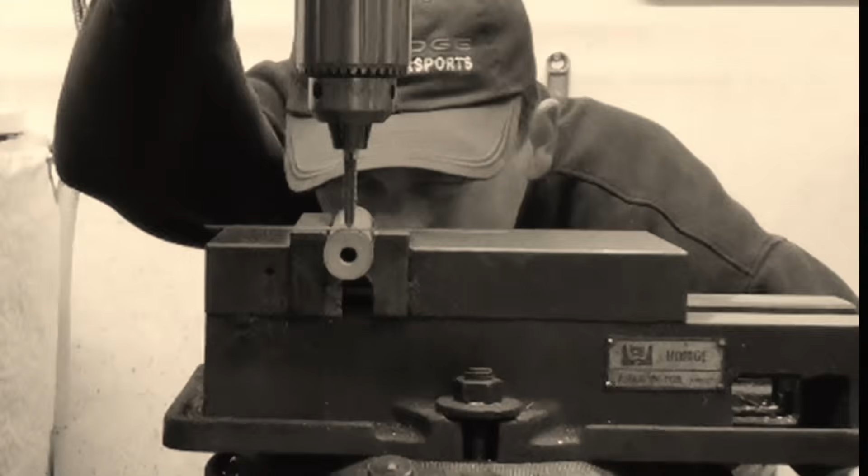Sometimes a machinist can look at a metal part and swear it is perfectly round. Then the part goes into service. It spins at speed. The oil film thins to almost nothing. The load hammers the metal thousands of times a minute, and suddenly the eye is no longer good enough. Tiny errors turn into disasters.

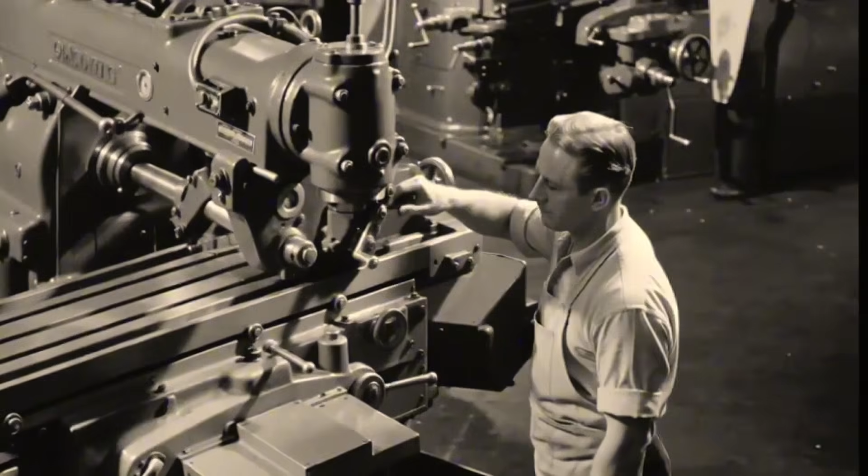Not round enough, and the bearing runs hot. Not concentric enough, and the shaft starts to vibrate. Then one day the whole production line begins to scream. That is the end of it. The line shuts down. Maintenance takes over.

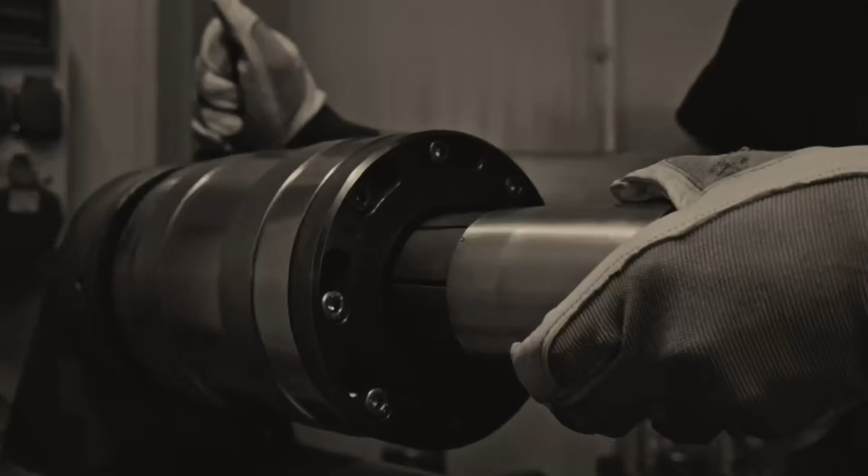Production stops. American machine tool history is full of famous giants: massive lathes, heavy milling machines, boring mills, planers, transfer lines. But there was another class of technology that drew far less attention. These were not the machines that carved a new shape out of raw stock. They came afterward. They took a part that was merely close and pushed it to the state modern industry actually needed: rounder, smoother, more concentric, more repeatable, and almost impossibly exact. That was the world of precision grinding.

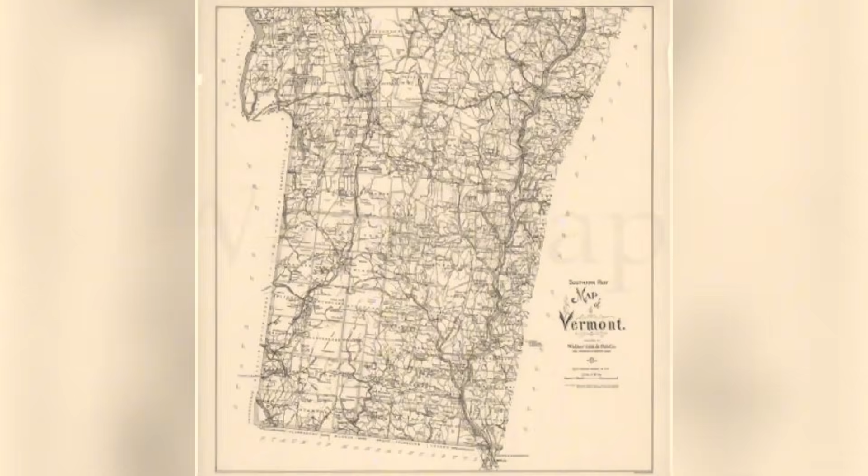And in 1909, in a small town in Vermont, William LeRoy Bryant founded a company to turn that simple idea into an industry. How do you grind parts held in chucks, internal bores, inside and outside diameters, bearing races, and circular surfaces until the remaining error almost disappears from human perception? In this video, we are tracing the story of the Vermont grinding machine that chased perfect roundness all the way down to the micron.

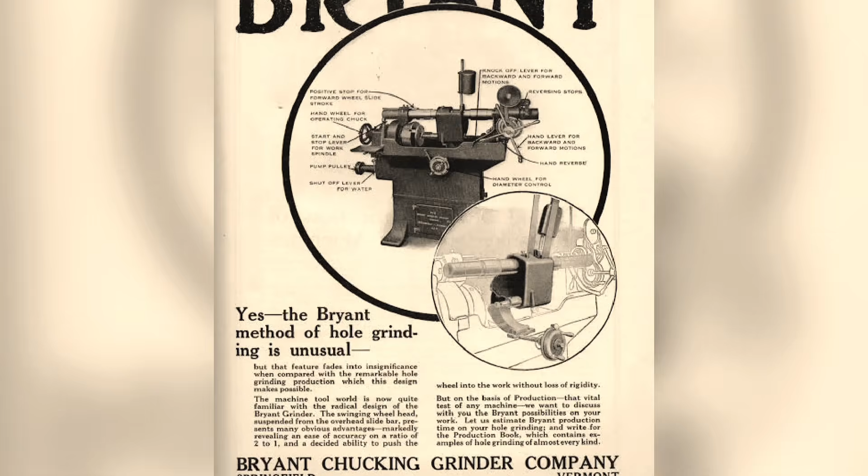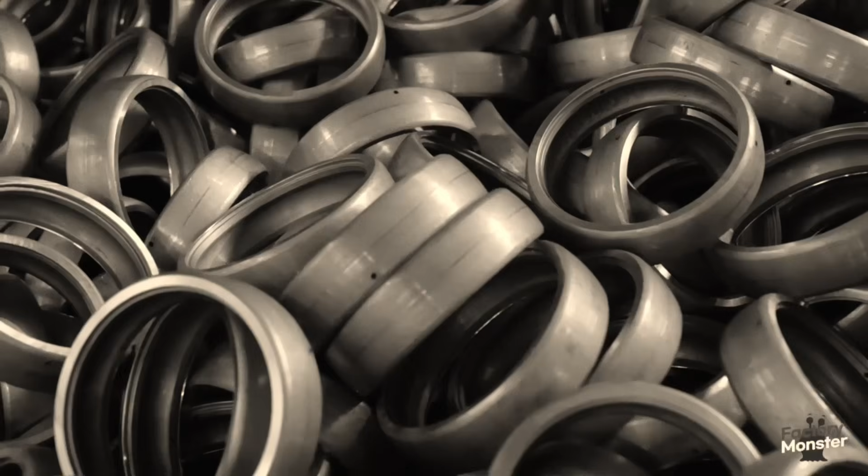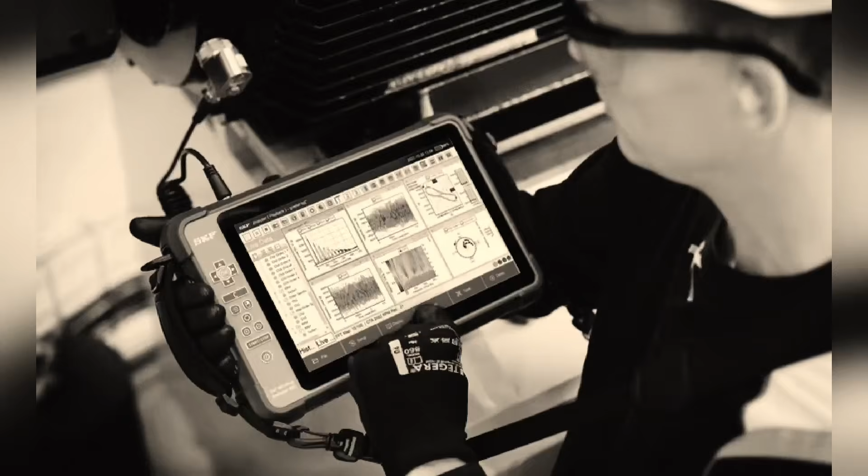First, we need to answer a basic question. Why did roundness become such a bottleneck in manufacturing? Most machinery depends on flatness. Flat surfaces are the foundation of machines, but roundness is what allows machines to rotate. When a shaft spins inside a bearing, its geometry cannot be merely approximate. When a ball bearing race carries dozens of hardened steel balls around a track, that surface cannot wander and ripple at will. When pistons, bushings, gears, spindles, housings, and engine parts work continuously, geometric error becomes heat, vibration, noise, and wear. And in mass production, the problem becomes much worse.

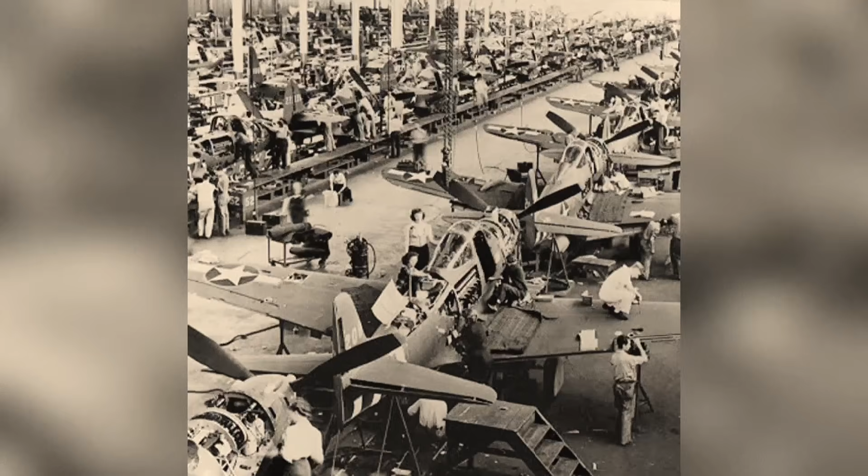A skilled machinist can rescue one part. The automobile industry does not need one part. It needs thousands, then millions, all effectively the same. Aviation does not need one engine that runs well in a test room. It needs many engines that can survive vibration, temperature, load, and flight time.

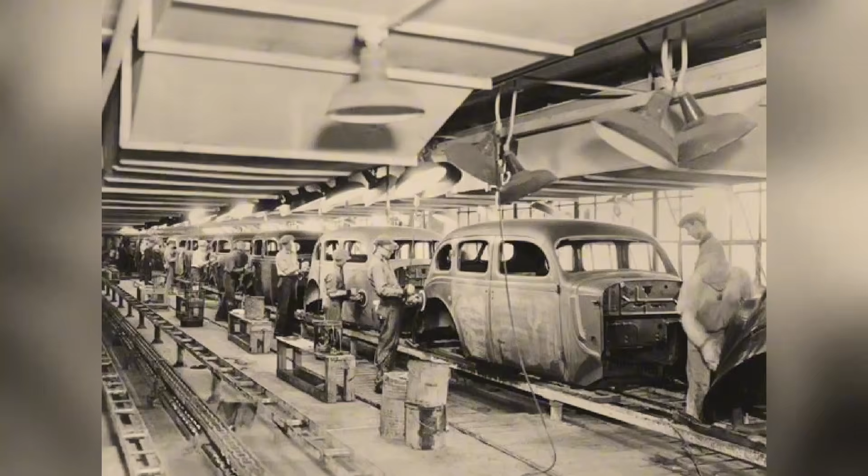By the early 20th century, American industry was entering the age of high-speed production. Automobiles were beginning to move from luxury goods into mass manufacture. Aviation was leaving the experimental stage. Machine tools were getting faster, steel was improving, grinding wheels were improving. But the faster industry moved, the clearer one fact became: cutting metal was not enough.

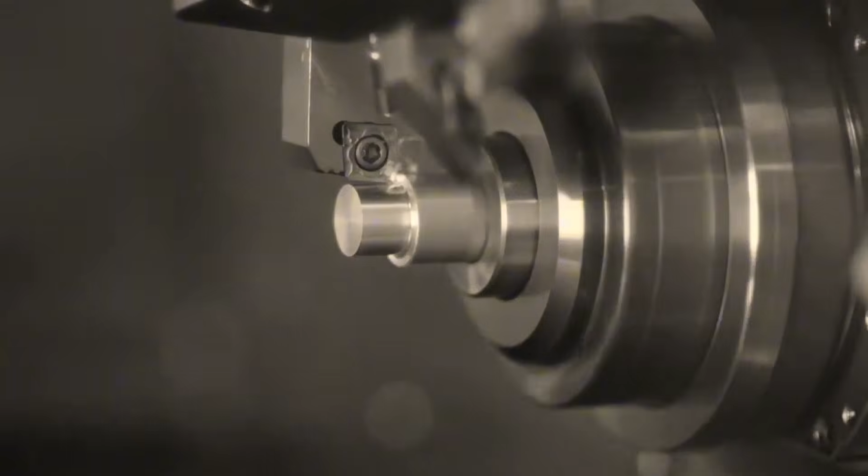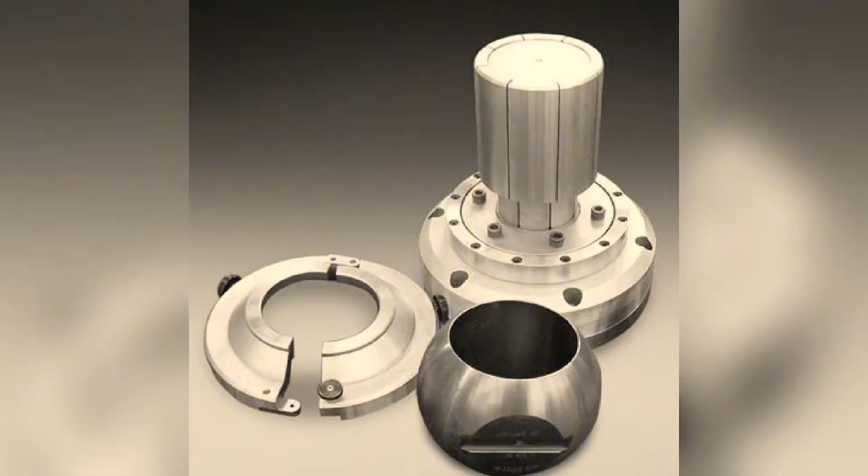A lathe could turn stock into a near cylinder. A drill and a boring tool could make a hole. A mill could generate surfaces and slots. But after those operations were finished, many parts still had to be ground. Grinding did not merely brighten a surface. It corrected the small remaining errors. It improved roundness. It stabilized size. It created surfaces that oil films, bearings, and high-speed motion could live with.

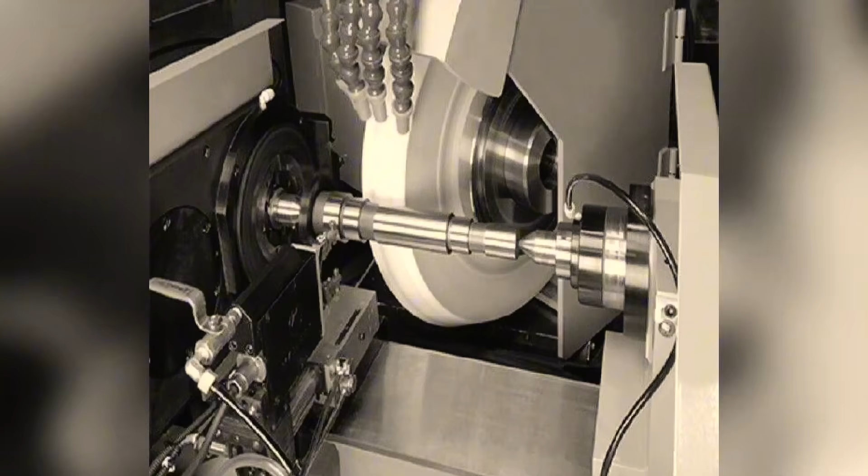The bottleneck was that the parts needing grinding were not always easy to hold. A long shaft could run between centers, but a short part, a ring, a bushing, a compact housing, or a turned semi-finished component often had to be held in a chuck. And once a chuck enters the problem, the challenge is no longer just rotating the work. The challenge is holding it truly on center, bringing the wheel exactly where it belongs, controlling the size, and repeating the process fast enough for production.

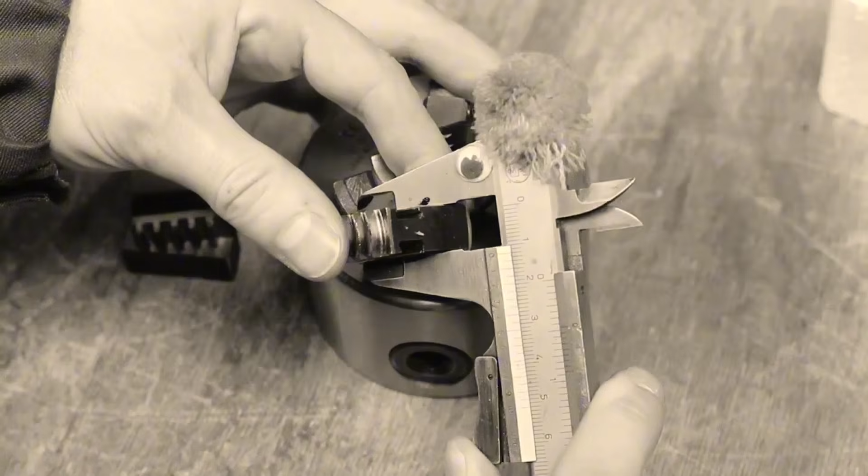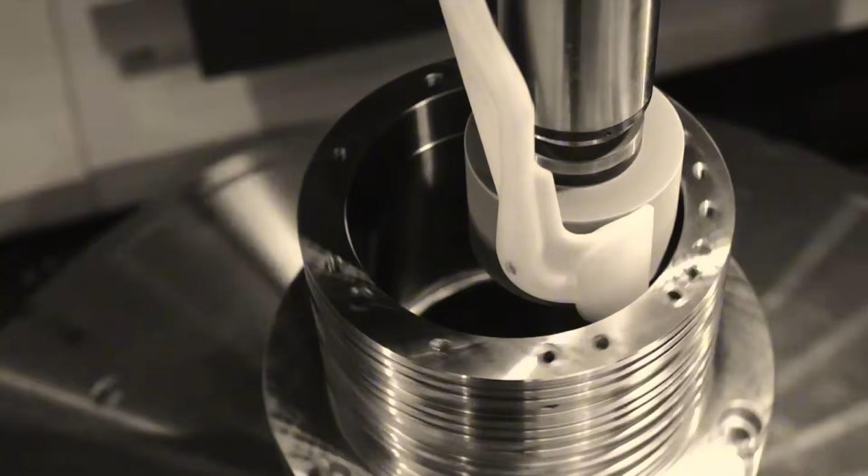That is why machinists became so familiar with a phrase like chucking grinder. It referred to a whole class of grinding machines built for parts held in chucks, usually as second operation work after turning or rough machining. This was exactly the kind of work the automotive industry, the bearing trade, precision equipment makers, and the defense sector increasingly needed. So the early 20th century demanded a new generation of grinders, faster, more accurate, more automatic, and better suited to quantity production. Bryant arrived at exactly the right time.

William LeRoy Bryant, usually called Roy Bryant, was no amateur. He came out of one of the most remarkable machine tool environments in America, Springfield, Vermont.

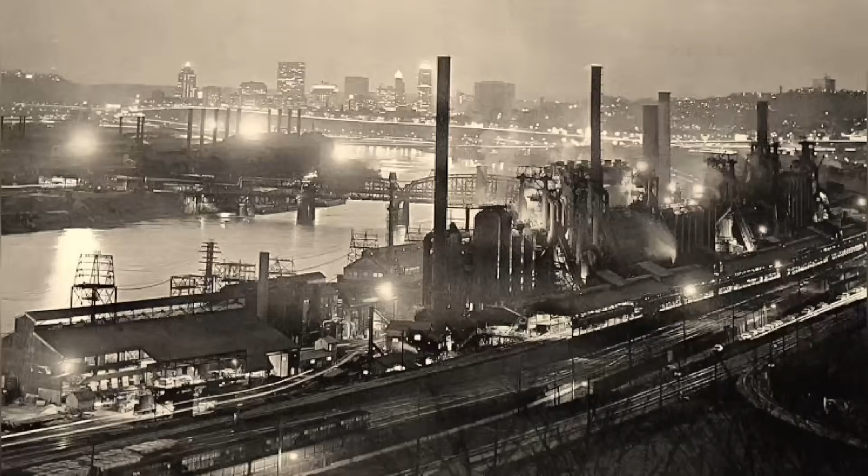The town had no obvious advantage like Pittsburgh with steel, Detroit with automobiles, or the coastal cities of New England with ports. What it had was something even more important: an unusually dense concentration of inventive masters. Springfield sat in what became known as Vermont's Precision Valley.

Jones Lamson Machine Tool Company had moved there from Windsor in 1888 under the leadership of James Hartness. Hartness was an inventor and executive, later the governor of Vermont, and most importantly for this story, a mentor to a generation of machine tool builders. Under Hartness, Jones Lamson was not just a factory, it became an unofficial school for mechanical engineers.

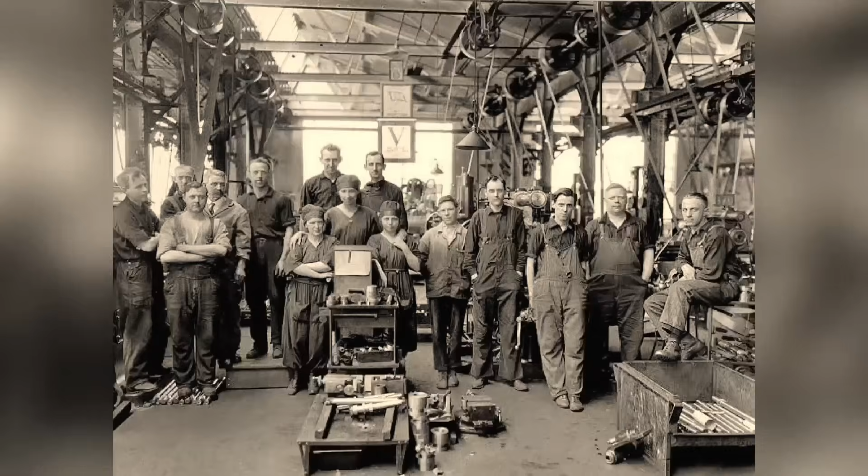Edwin Fellows left that world to found the Fellows Gear Shaper Company in 1896. Fred P. Lovejoy founded Lovejoy Tool Company. William L. Bryant founded the Bryant Chucking Grinder Company. Together, these firms turned Springfield into a machine tool center far more influential than the town's size would ever suggest.

Bryant joined Jones Lamson in 1897. By 1899, he was head of the drafting department. By 1905, he had become chief engineer.

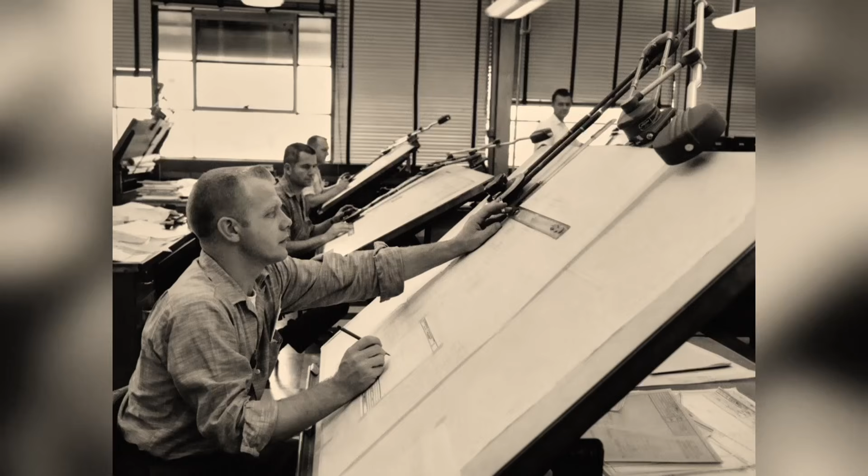In a machine tool company, the draftsman and designer must understand cutting forces, bearings, castings, tolerances, drives, cutting tools, and the operator at the machine. A bad drawing does not merely make an ugly machine, it makes a machine that cannot be built, aligned, or trusted to hold tolerance.

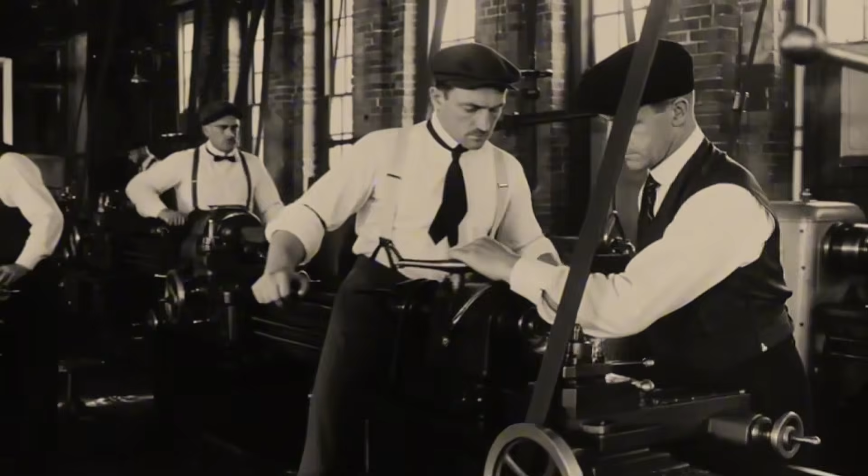While working with Jones Lamson chucking lathes, Bryant saw a problem that had not been properly solved. After turning, many parts still needed grinding in a second operation. If that grinding was done slowly, the line choked. If it was done inaccurately, the value of precision turning was lost. Out of that problem, Bryant developed a multi-spindle grinding machine for second operation work.

James Hartness encouraged him to strike out on his own. Hartness also helped provide the initial financing and became the first president of the Bryant Chucking Grinder Company. Roy Bryant later assumed leadership himself. In 1909, the Bryant Chucking Grinder Company was established in Springfield, Vermont.

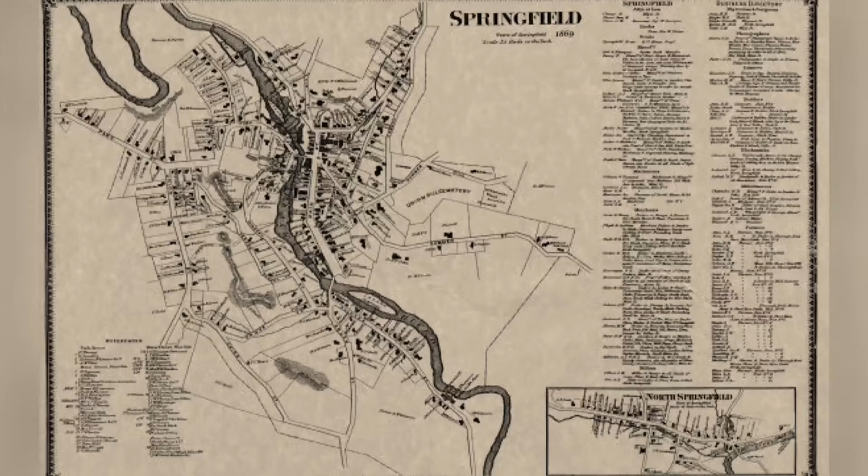A year later, in 1910, the company built a plant of roughly 20,000 square feet directly across from Jones Lamson. That same year, Bryant shipped nine machines to Ford and Cadillac, aiming straight at the most important industrial market in America, Detroit. It was a shrewd move.

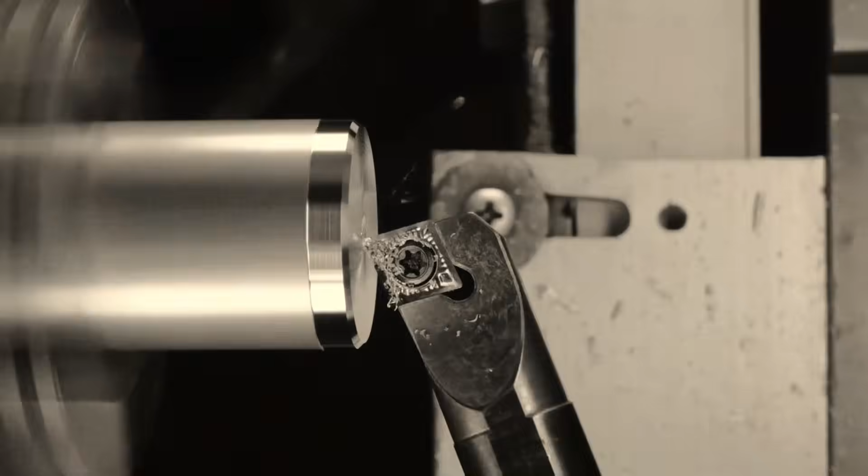To understand Bryant, it helps to understand the difference between shaping and finishing. A lathe creates form. It spins the work and uses a cutting tool to bring the metal near its intended diameter. A lathe can be extremely accurate, but the tool still leaves tool marks, cutting forces, slight distortion, and small geometric errors. For some parts, that may be enough. For simple shafts or lightly loaded components, near enough can be good enough, but for bearing races, bores, bushings, thrust faces, engine parts, and precision mechanisms, near enough is not enough.

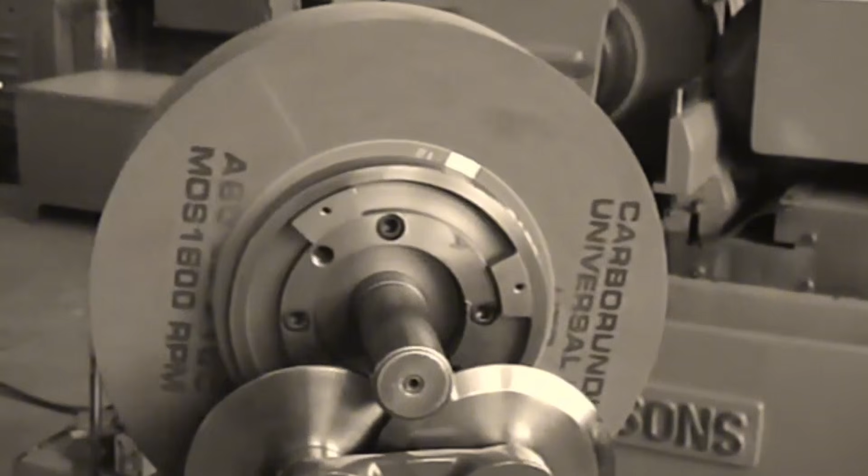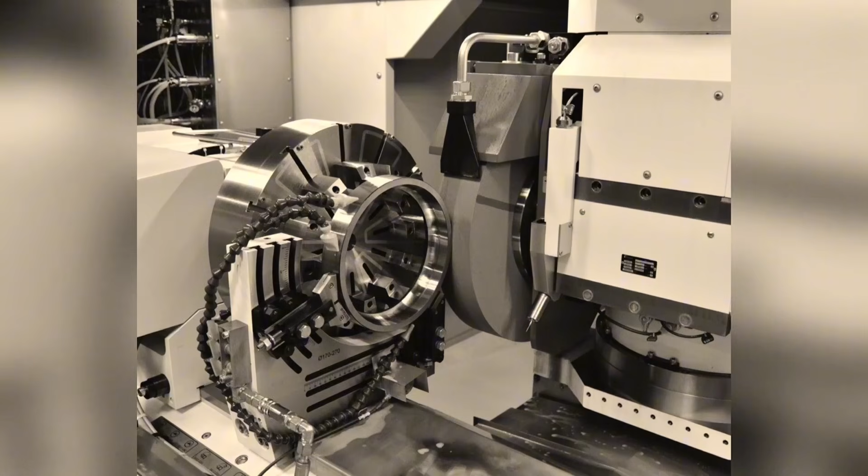A grinding wheel does not cut like a single-point lathe tool. It is made of countless abrasive grains, each removing a tiny amount of material. The result is that grinding can control size and surface in ways rougher cutting processes struggle to match. But grinding also generates heat. It demands rigidity, it demands a good spindle, it demands a method of holding the work without distorting it, and in mass production, it also demands speed.

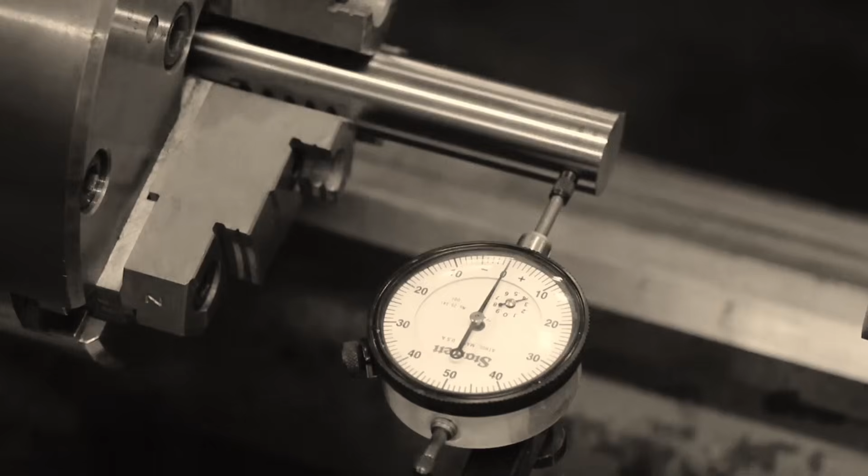Bryant's chucking grinders attacked that problem from the production side. The part was clamped in a chuck or fixture and rotated. The wheel approached the surface to be finished. Depending on the configuration, the machine could handle outside diameters, inside diameters, or related surfaces. With multi-spindle design, multiple tasks could be performed in parallel or in a more tightly organized sequence. That transformed grinding from a slow, isolated operation into a production step with rhythm.

The critical point was not merely absolute accuracy, it was repeatable accuracy. A machine that can produce one good part does not change an industry. A machine has to produce the first good part, the second good part, the 100th, and the 1000th. A factory manager does not only ask whether a machine can grind, he asks whether it can hold size through an entire shift, whether it is easy to set, whether the output remains consistent. Bryant built its reputation by answering those questions well.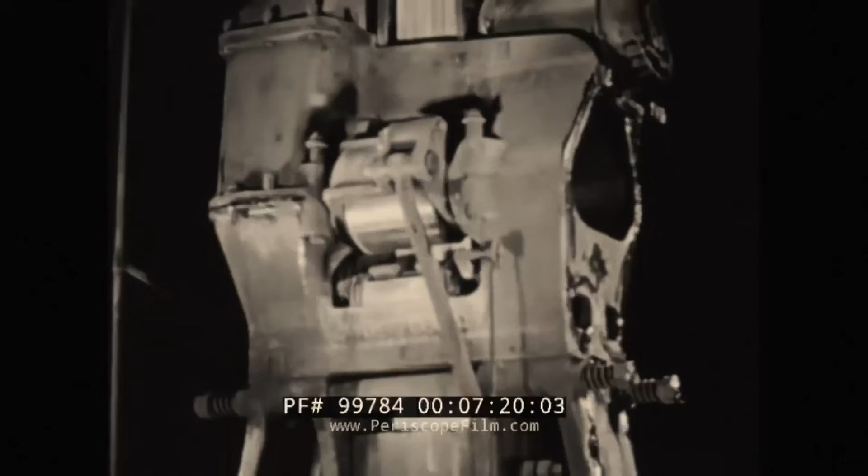In the 1930s, as the Great Depression forced many machine tool builders out of business, Bryant used the slower market to improve its designs. Manual machines were developed toward semi-automatic operation. Hydraulic drives replaced some pneumatic systems. Automatic sizing options appeared. Motorized spindles were introduced rather than relying entirely on gear or belt transmission.

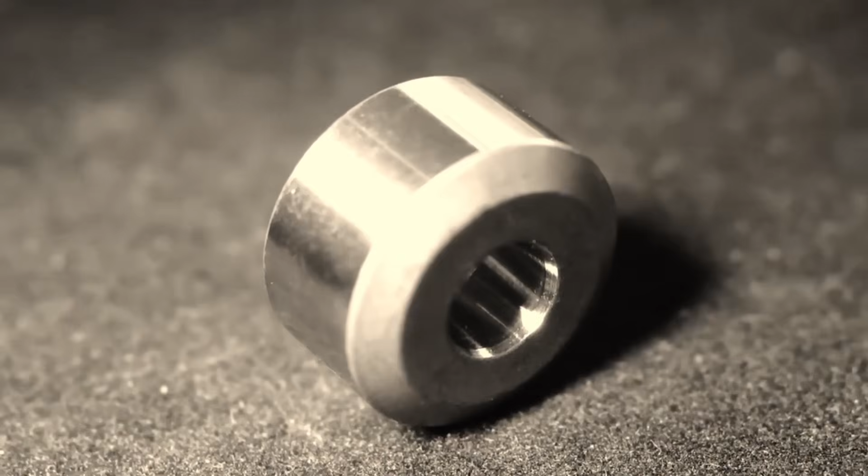These sound like technical refinements, but their meaning was practical. Semi-automatic meant the operator did not have to execute every motion by hand. Hydraulics meant smoother and stronger motion. Automatic sizing meant the machine could move closer to knowing for itself when the part had reached size. Self-powered spindles meant greater control with fewer layers of mechanical transmission. All of it pushed Bryant in the same direction: precision grinding at production speed.

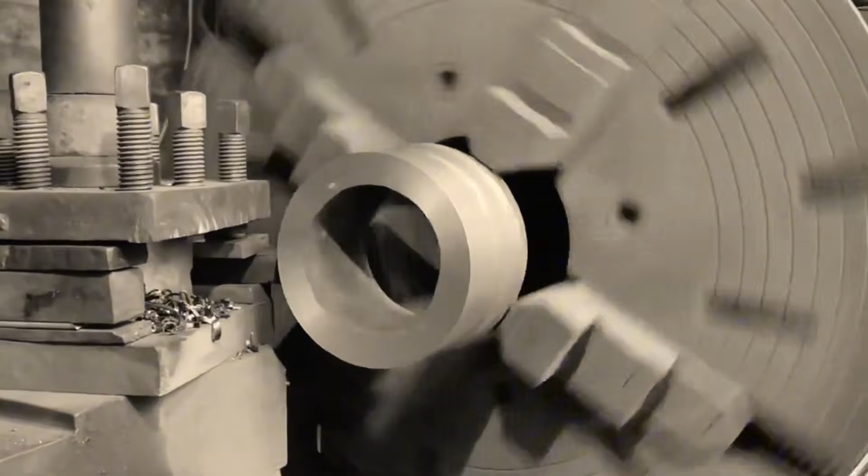That was why the company steadily expanded into automotive work, aviation, bearing manufacture, and precision equipment. Each industry had its own demands, but all of them needed the same things: round parts, accurate bores, fine surfaces, and repeatability.

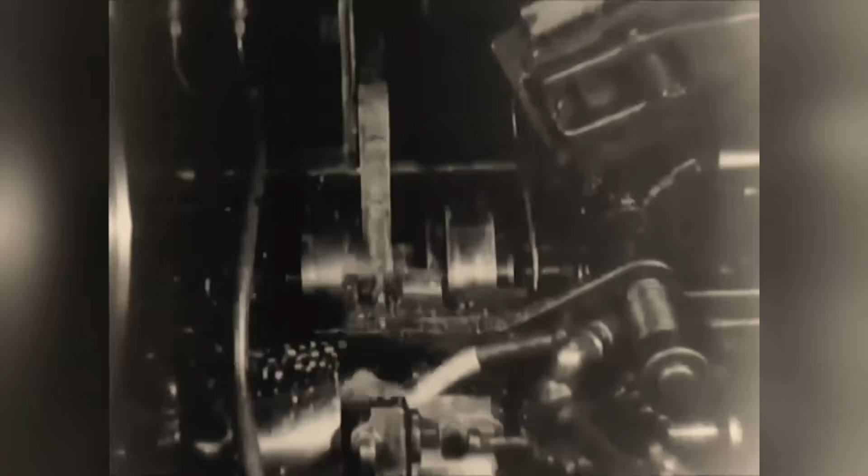When Bryant shipped 9 machines to Ford and Cadillac in 1910, it was still only beginning to step out from the shadow of Jones and Lamson. But those orders showed that the automobile industry had already recognized the value of precision grinding. Ford and Cadillac did not buy machine tools for curiosity's sake. They bought them because automobile production required thousands of rotating and sliding parts: engines, transmissions, shafts, bearings, bushings, drive assemblies, and accessory mechanisms all depended on small geometry. A car might be sold on styling and power, but its reliability lived inside the parts the buyer never saw.

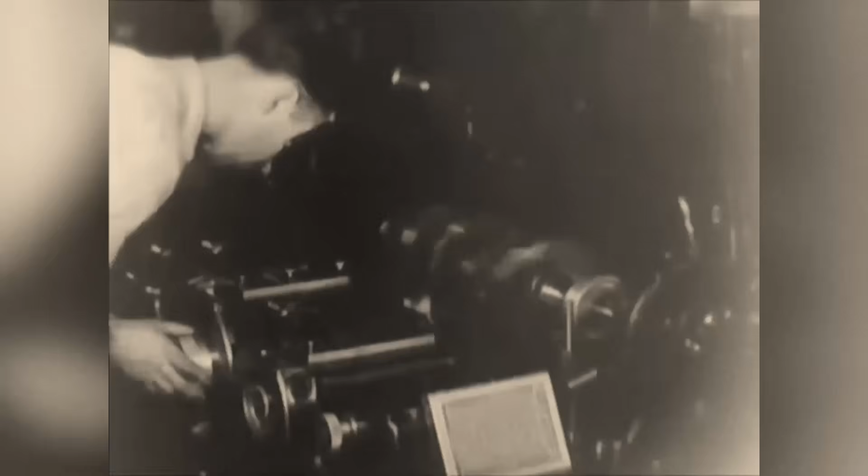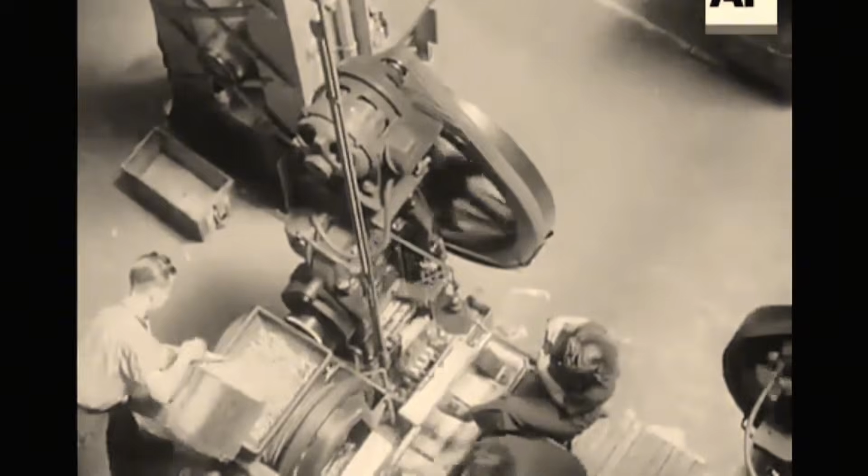Then came the First World War. By 1917, the Bryant plant had doubled in size and was running 3 shifts a day. The company leased additional space from Jones and Lamson to help produce artillery shells. Wartime demand also pushed Bryant to develop 2 new machine models for the aircraft industry.

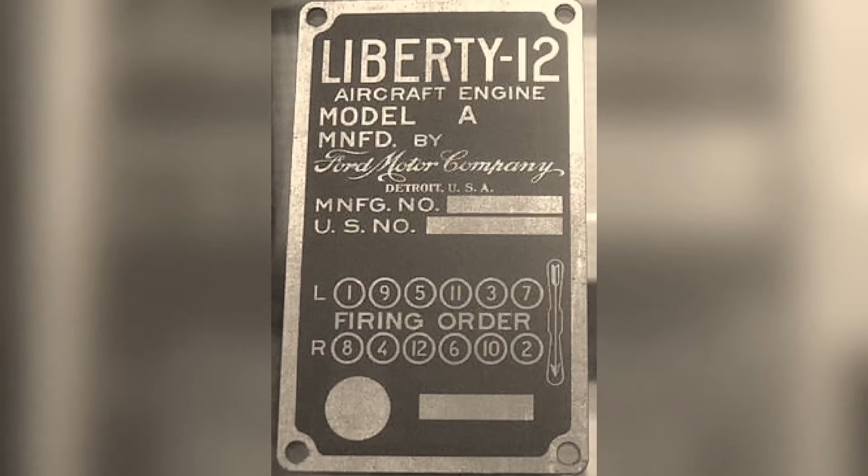One of the most significant milestones came through the Ford Aircraft Division. During the First World War, Ford's aviation operation used 102 Bryant machines in the manufacture of Liberty engines. That was no trivial detail. The Liberty engine was one of America's major wartime efforts to standardize and rapidly produce aircraft engines. And if an aircraft engine requires large numbers of precision parts, then grinders like Bryant sit directly inside that capability.

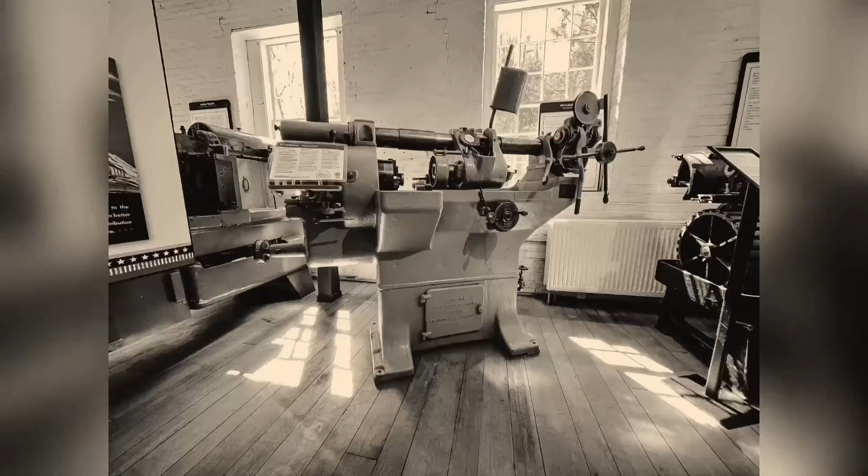Bryant's reputation for precision grew from there. According to historical material later cited by Vermont Machine Tool, from the First World War through the interwar years and into the Second World War, much of the grinding work done on aircraft engines was performed on Bryant machines.

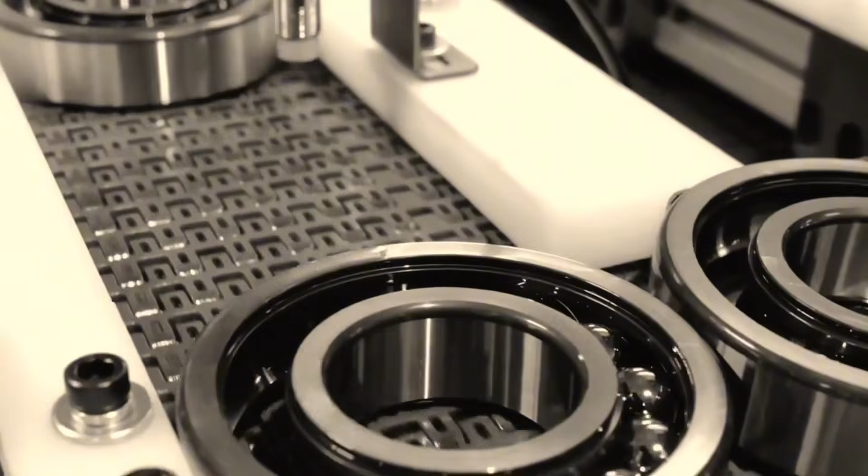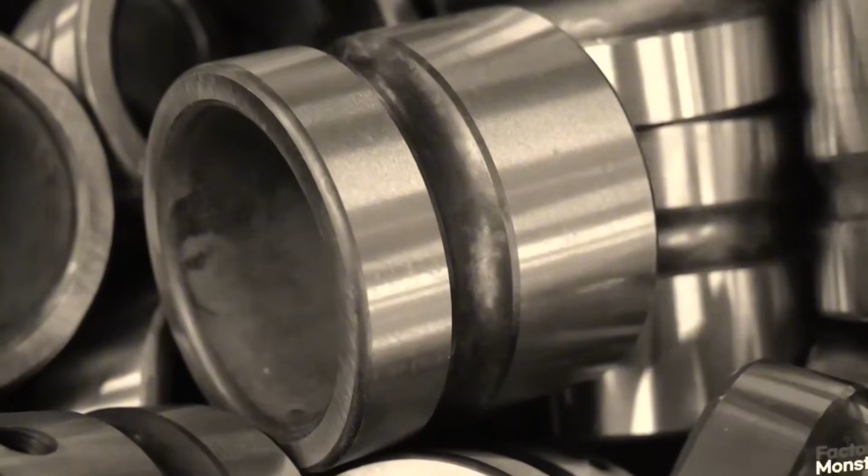After aviation, Bryant moved deeply into the bearing industry. That made perfect sense. Bearings are one of the harshest tests of circular geometry. The inner ring, the outer ring, the raceway, the faces, the finish, and the concentricity all affect friction, temperature, noise, and life. A good bearing is not merely good steel. It is good steel machined to the correct geometry. As automobiles, industrial machinery, aircraft, and military equipment demanded more bearings, precision grinding became part of the industrial foundation.

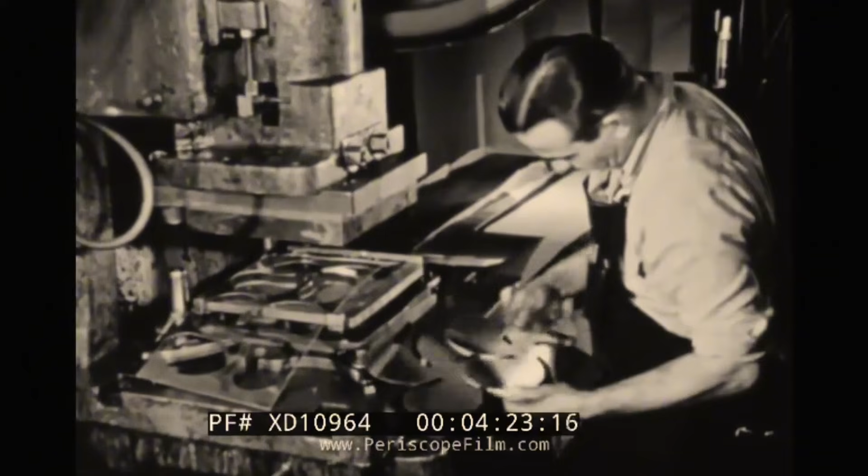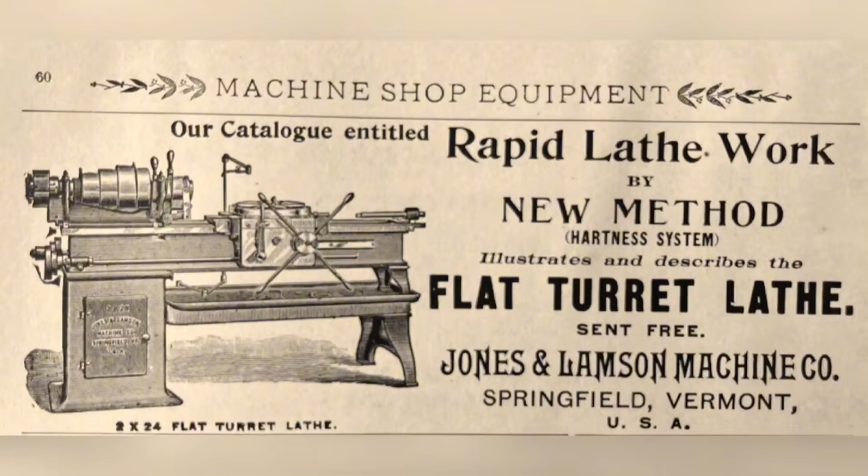Roy Bryant remained president and general manager until his death in 1931. He was succeeded as president by E.J. Fulham, then treasurer of the Fellows Company. That detail also reveals how tightly Springfield's industrial network was woven together. Jones and Lamson, Fellows, Bryant and Lovejoy were not just geographically close. They shared people, capital, technical knowledge, engineering culture, and a common vision of precision manufacturing.

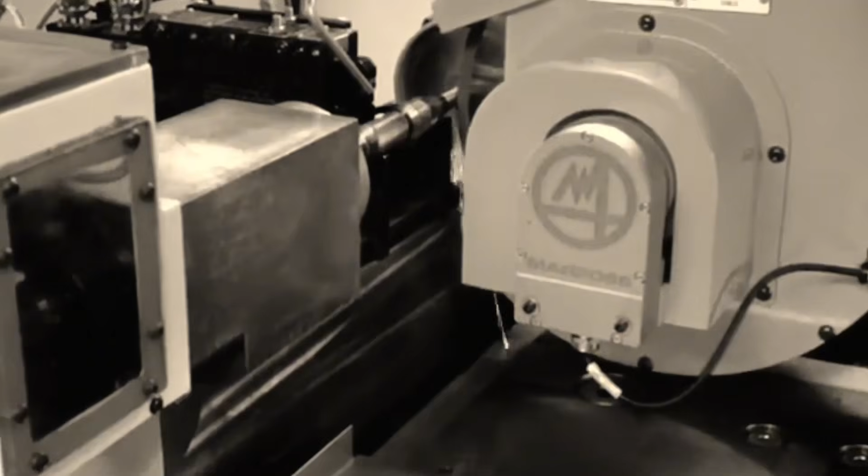During the Great Depression, many machine tool firms were crushed as factories across America stopped buying new equipment. Bryant survived because its product occupied the part of production where customers still needed precision and productivity. Exports also helped some American builders endure. In the 1920s and 1930s, the Soviet Union became a major customer for various American industrial firms, including Ford and some machine tool manufacturers. But Bryant did not simply wait for the market to recover. It used the hard years to improve the machines. That mattered when the world moved toward another war.

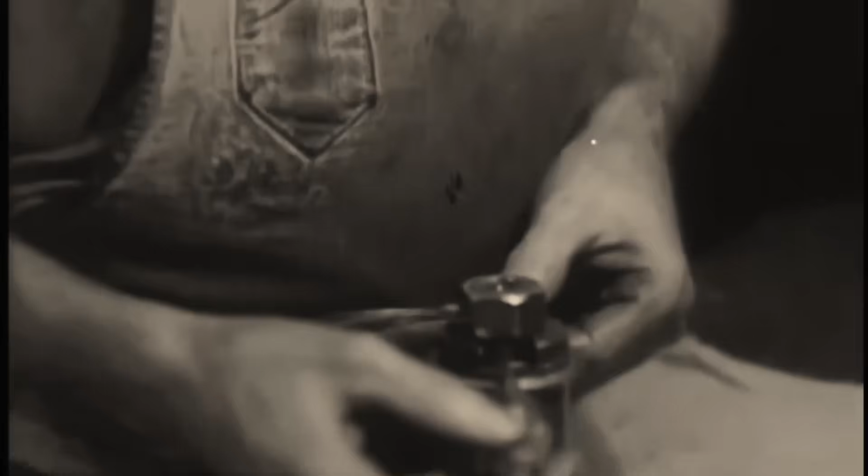Before the Second World War, Bryant was already an important name. The war pushed everything to another scale. In 1938, Bryant's sales tripled. In 1940, the United States Army Ordnance Department asked the company to expand its plant to roughly 127,000 square feet. By 1942, the workforce had grown to around 1,350 people, including about 200 women.

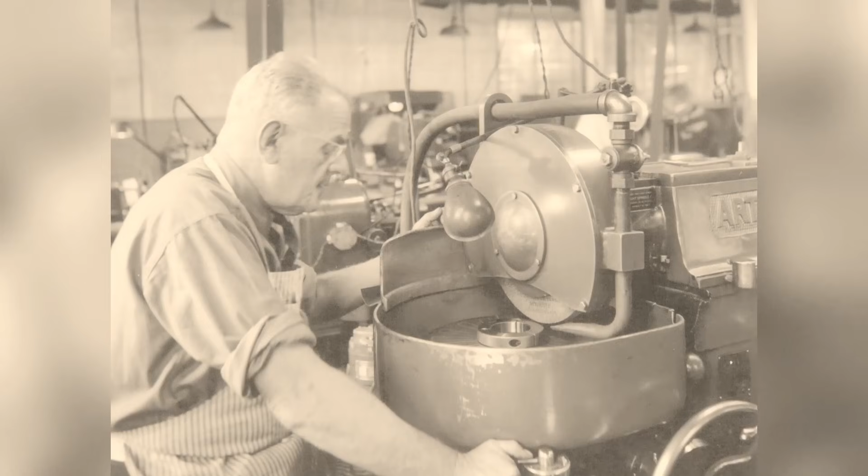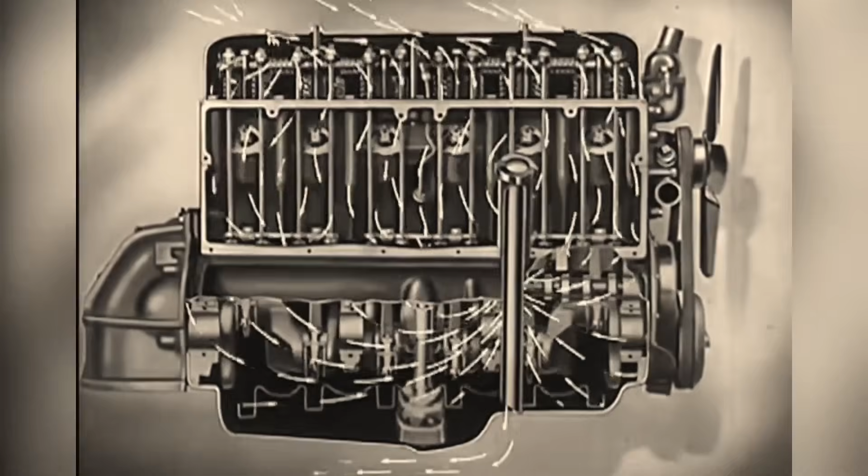Those numbers tell us something important. They tell us that grinding had ceased to be a secondary concern. In industrial war, precision grinding was a strategic capability. If engine parts, bearings, control mechanisms, aircraft components, and complex assemblies could not be ground accurately, weapons production slowed. An airplane does not merely need aluminum and horsepower. It needs thousands of rotating surfaces, bores, and round parts that function correctly under load.

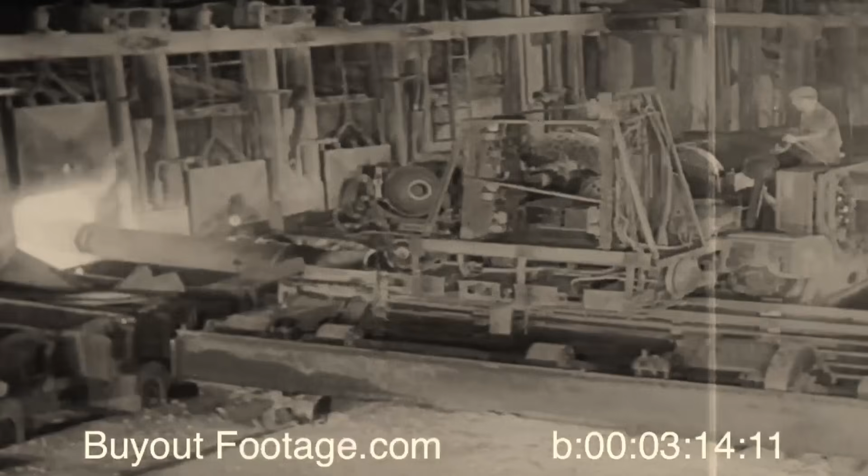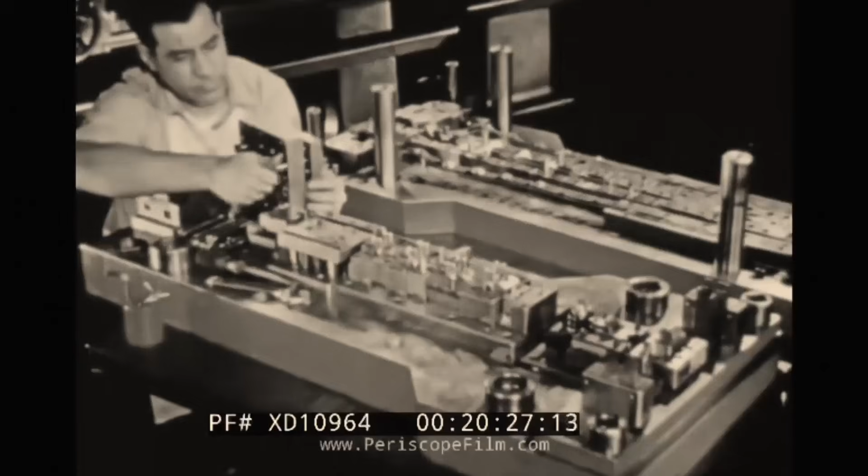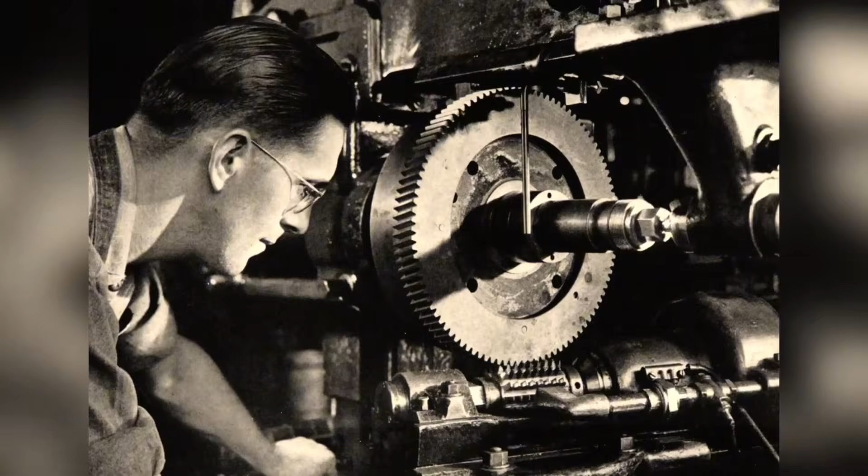Demand became so high that, like many wartime manufacturers, Bryant saw its products built under license by other concerns. During the war, Bryant also manufactured certain radar units for Raytheon and General Electric. That points to another side of American machine tool companies. They did not merely build machines for others. When war demanded it, they could become manufacturers of precision equipment in their own right. A company fluent in spindles, grinding wheels, bearings, chucks, and tolerances already possessed much of the technical foundation needed to produce far more complex devices.

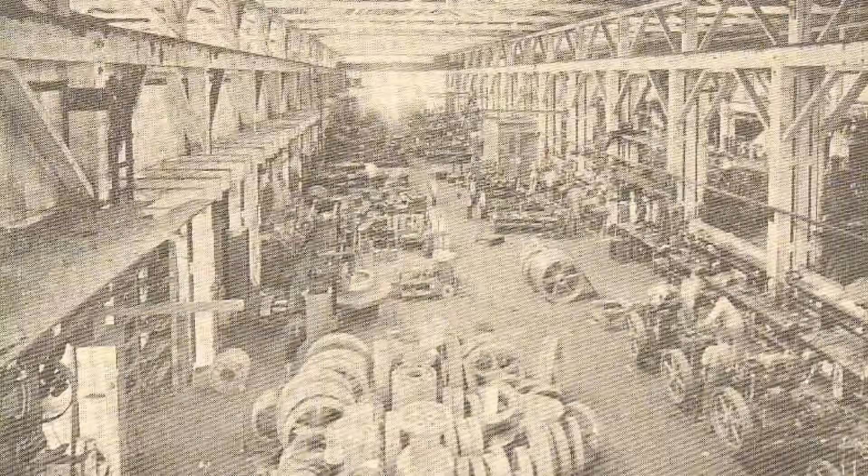Under government direction, the war also left a larger lesson. Industrial power does not reside in a single invention. It resides in a network. Bryant needed steel, bearings, grinding wheels, motors, assemblers, engineers, inspectors, suppliers, military customers, and neighboring companies.

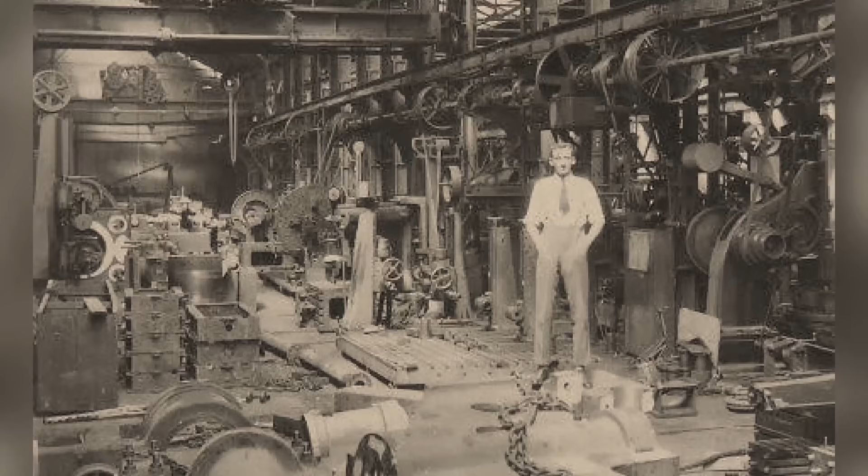Springfield, Vermont became one node in that larger system. During the Second World War, Springfield's importance was so great that the U.S. government reportedly ranked Springfield, together with the nearby Cone Automatic Machine Company in Windsor, as the seventh most important bombing target in the event of an attack on American industrial capacity. That sounds strange for a small Vermont town. But once you understand machine tools as the machines that make other machines, it becomes logical. Destroy the machine tool base, and you cripple the ability to replace, repair, and expand production.

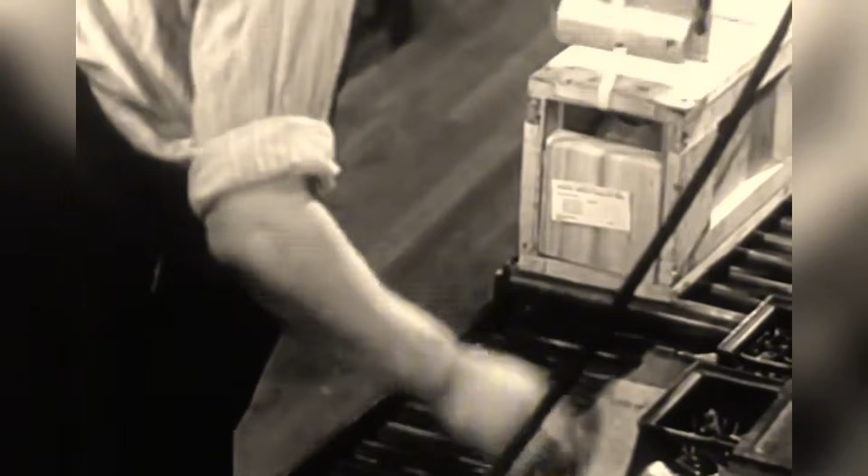In 1946, Joseph B. Johnson, a longtime Bryant employee who would later become governor of Vermont, became vice president and general manager. The company entered the post-war era with a strong reputation, export markets, and deep experience in aviation, bearings, and defense work. But the post-war machine tool world was not going to stand still.

After the war, Bryant remained a strong company, but the structure of the industry was changing. The Korean War drove demand upward again. In the mid-1950s, Bryant's expertise in precision spindles opened a path into a new field, drum memory for computers.

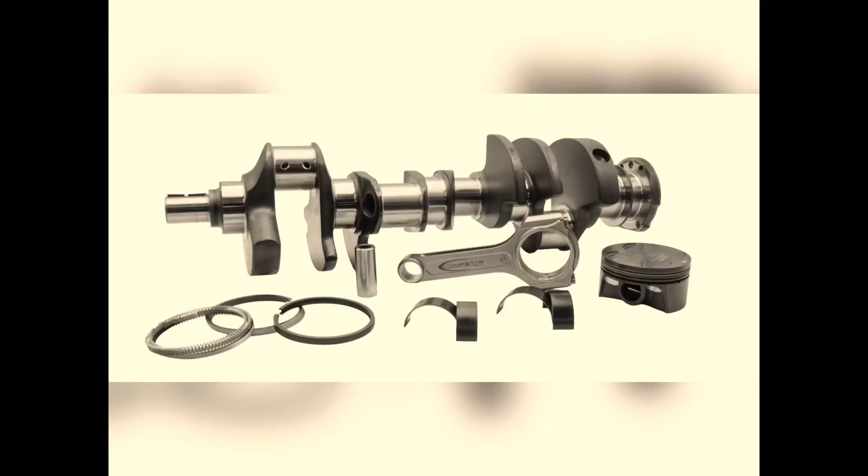At first glance, that sounds unrelated. Technically, it made perfect sense. Drum memory required precise rotating assemblies, fine surfaces, and highly refined mechanical manufacture. A company skilled in grinding and spindle design was well positioned to enter that kind of work.

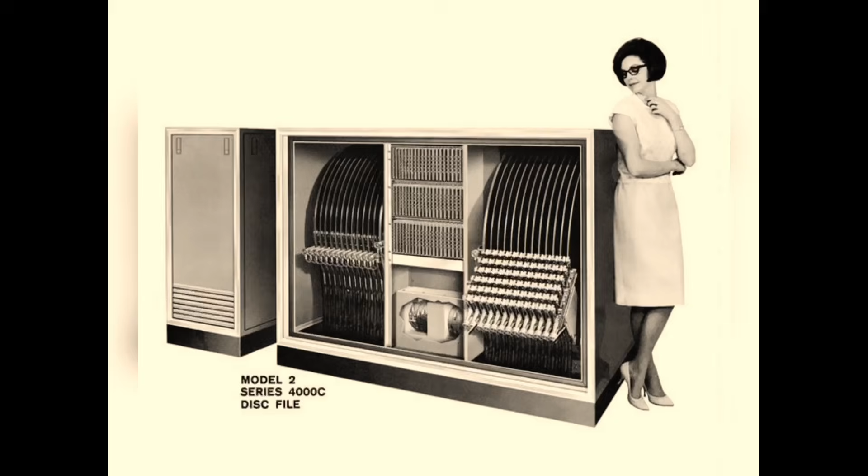In 1958, Ex-Cell-O Corporation of Detroit acquired Bryant. After the sale, Bryant's computer product activity grew rapidly and was eventually moved to Walled Lake, Michigan, where it was folded into another Ex-Cell-O division.

This was a familiar turning point in American machine tool history. An independent company became a division inside a larger corporation. That could bring capital, broader markets, and a larger network, but it could also strip away some local identity and autonomy. Bryant did not disappear overnight, but from this point onward, its story was no longer only the story of Roy Bryant and Springfield. During the Cold War, precision grinding also became a geopolitical issue.

In the early 1960s, the U.S. Department of Commerce blocked Bryant from carrying out a major order for the Soviet Union. The reason was straightforward. Precision grinding machines were not only civilian tools, they could improve military capability. A machine able to grind small parts to high precision could serve the production of bearings, gyros, guidance mechanisms, engines, and systems no strategic rival was supposed to possess at the highest level.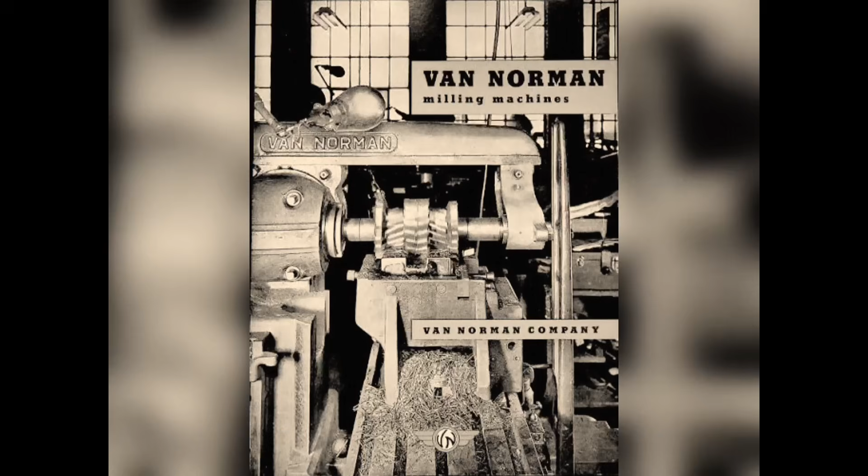In 1972, Bryant acquired the line of precision external centerless grinders from the Van Norman Machine Tool Company. Around the same period, Soviet contracts continued to generate controversy. One proposed sale of 45 precision grinding machines to the Soviet Union drew criticism because it might help improve intercontinental ballistic missile accuracy and multiple warhead capability.

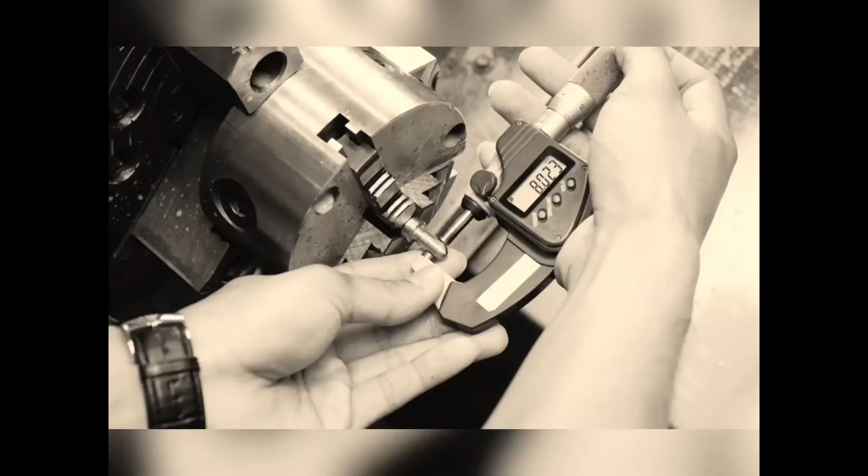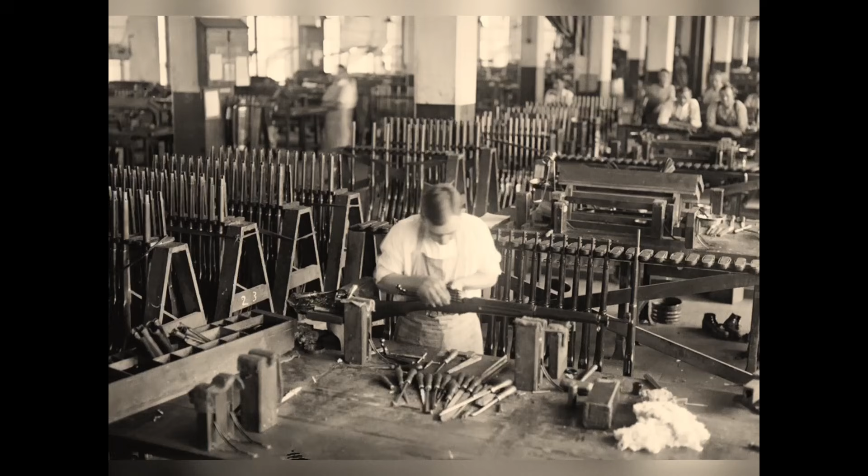This was the darker side of precision machine tools. The machine itself has no political beliefs. It simply holds tolerance. But tolerance is power. The same ability to grind accurately can produce bearings for trucks, shafts for industrial machinery, or components for weapons systems. Governments in the 20th century understood that very well.

Bryant also entered the era of numerical control. In 1980, Bryant introduced the Lectroline LL3 and demonstrated it at the International Manufacturing Technology Show. According to Bryant's own historical record, the LL3 was described as the world's first numerically controlled multi-surface grinding machine.

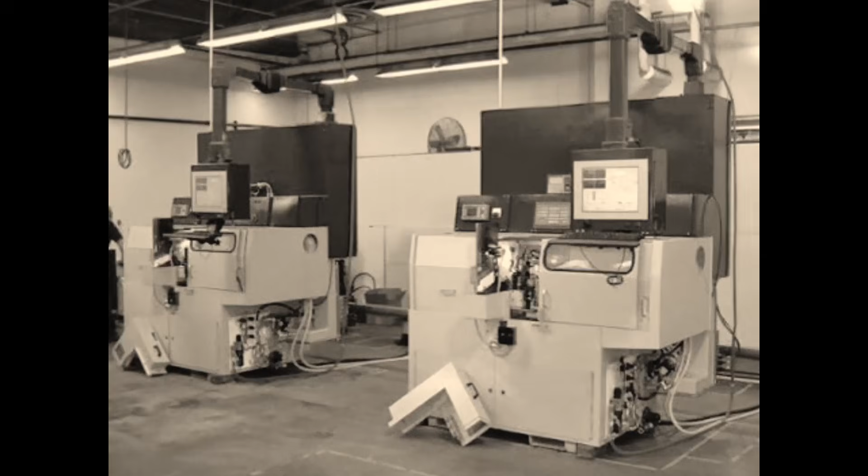The LL1, LL2, and LL4 followed, extending the range from very small internal diameters to very large outside diameters. It should have been the beginning of a brilliant new chapter. But new technology does not always save an old corporate structure.

In 1986, XLO and its subsidiaries, including Bryant, were acquired by Textron. In 1988, Textron sold Bryant to the Goldman Group, a financial investment organization. Historical accounts of Bryant suggest that the new owners had limited experience in the machine tool business, and the result was a difficult period for the company, its customers, and its suppliers.

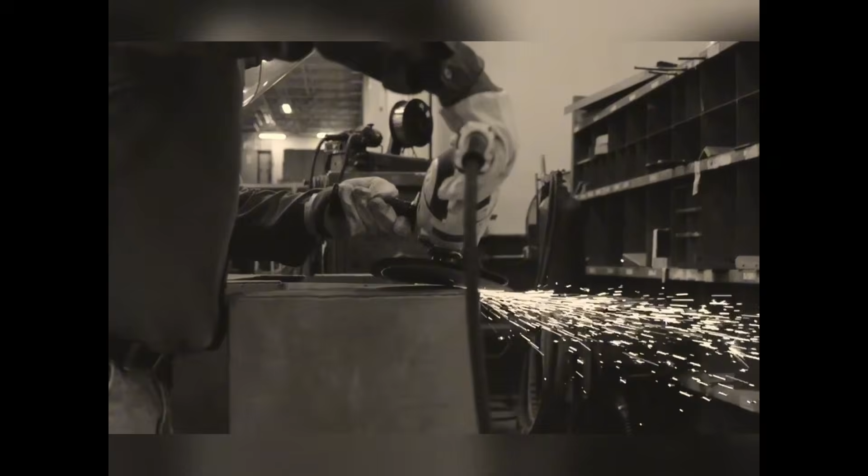In February 2002, Bryant Grinder shut down abruptly. Many believed the Bryant name might never return. It was a familiar moment in American industrial history. A company that had survived wars, the Depression, the rise of automobiles, aviation, and numerical control nearly died in peacetime because of ownership structure, management, and a shifting industrial economy.

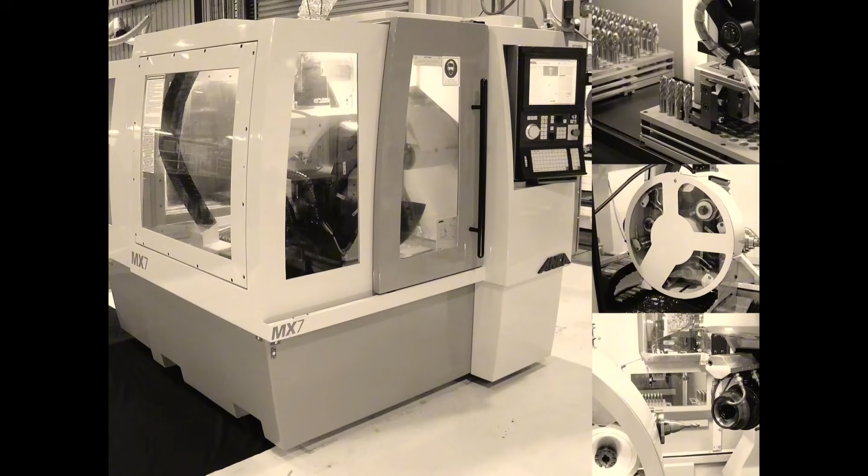But the Bryant story did not end in 2002. In July of that year, Vermont Machine Tool purchased Bryant Grinder and continued operating it in the CNC grinding market. That preserved the most important part of the legacy: the technology, the service knowledge, the spare parts, the technical memory, and customer trust. In 2015, Fives acquired Bryant's technology, intellectual property, and service operations. The Bryant line was then developed within the Fives Landis system in Hagerstown, Maryland.

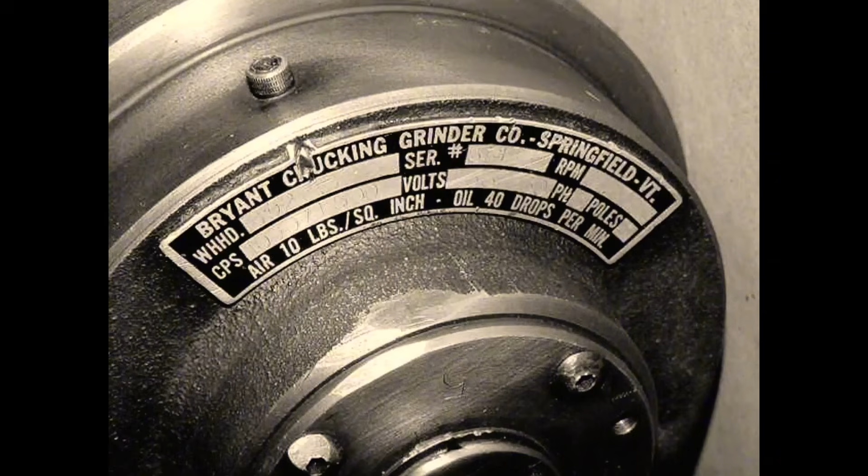It was an ending that was both sad and realistic. Bryant was no longer the independent Springfield company of Roy Bryant's day, but its name, engineering, and applications continued inside a global machine tool group.

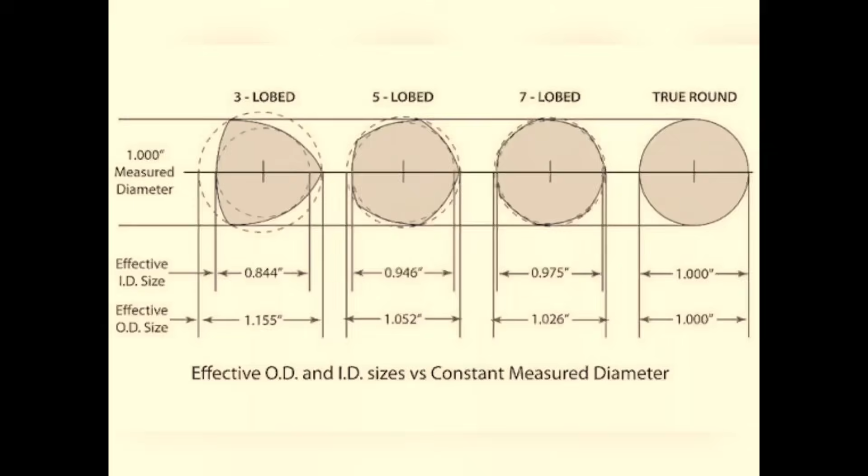So after all the rise and all the collapse, what exactly was left behind? First, Bryant solved the right problem. Roundness does not happen by itself. It has to be designed, fixtured, ground, measured, corrected, and repeated. Every silent bearing ring inside an industrial machine depends on a chain of technologies behind it. Every automobile line, aircraft plant, and defense facility depends on that chain. Solve the right problem, and you can create an entire industry around it.

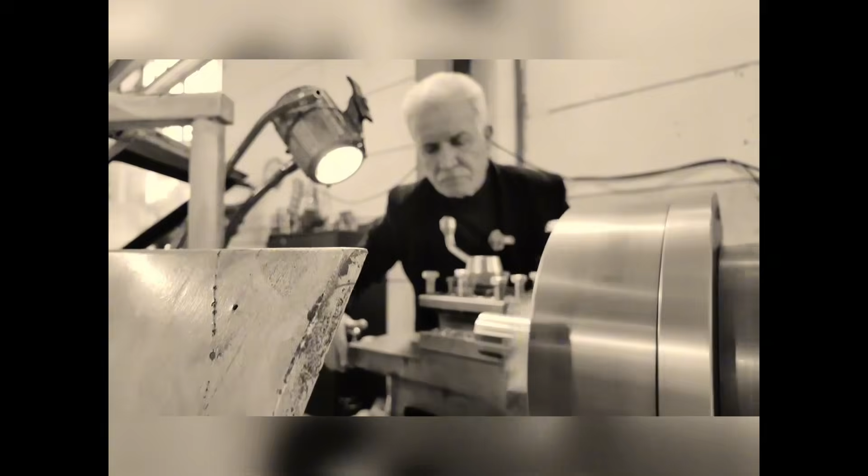Second, Bryant demonstrates the power of the industrial cluster. Springfield, Vermont did not become Precision Valley because of one company alone. It became that because of an ecosystem: James Hartness at Jones Lamson, Edwin Fellows with gear shaping, Roy Bryant with chucking grinders, Lovejoy with tooling, and the draftsmen, assemblers, inspectors, salesmen, and managers who sustained a culture of precision. When one skilled man left to found his own company, the ecosystem did not lose capability. It multiplied it. Third, Bryant is a reminder that machine tools are strategic power.

In peacetime, Bryant grinders made automotive parts, bearing races, and industrial components. In war, they entered aircraft engines, defense production, radar, and supply chains the government considered vital. During the Cold War, they became sensitive exports because geometric accuracy could become military strength. A grinding machine does not need a flag to have geopolitical value. It only needs to make tolerances others still cannot.

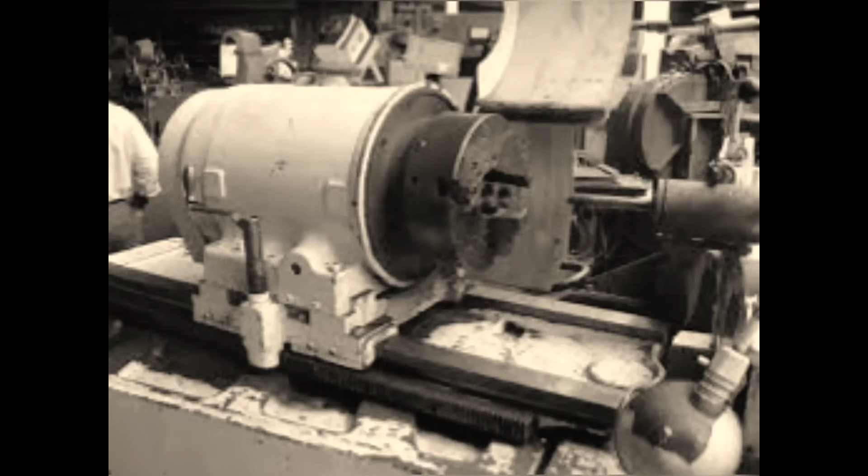And finally, Bryant teaches the fragility of industrial legacy. A company can live for nearly a century, possess superb products, strategic customers, rare technical knowledge, and a respected name, and still be threatened by conglomerate ownership, financial management, changing markets, and the weakening of its domestic industrial base. Bryant did not become vulnerable because roundness stopped mattering. Roundness still matters. Bryant became vulnerable because the company behind that capability had to survive in an economic world changing faster than its old structure could bear.

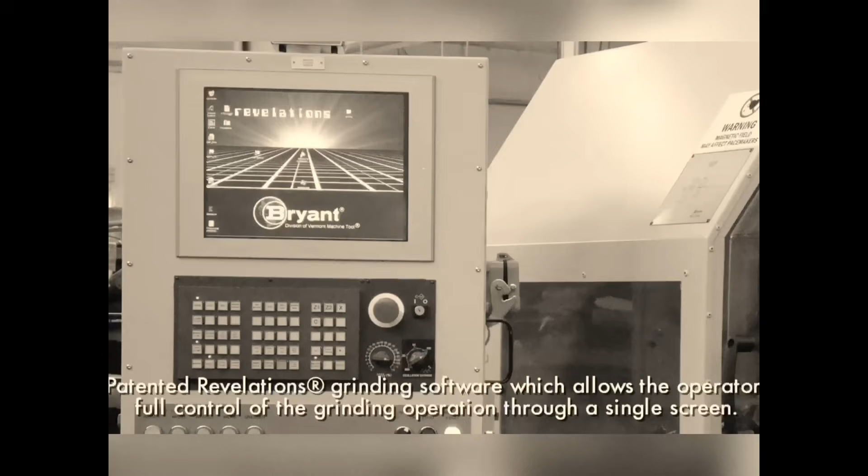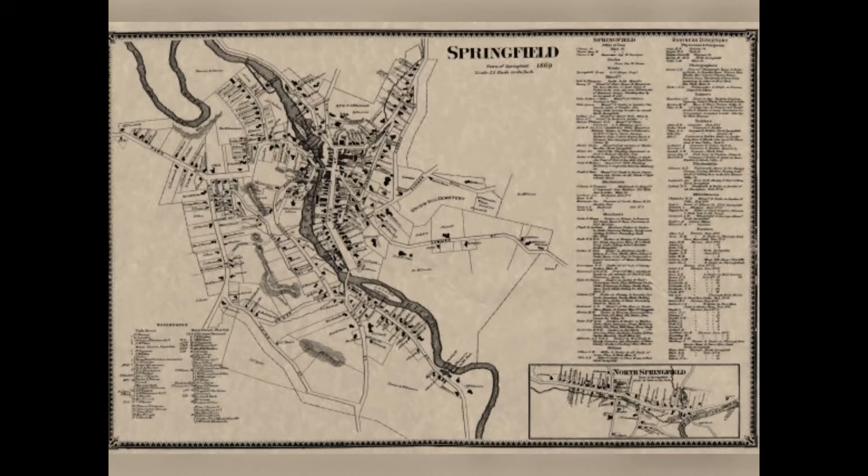But like so many American machine tool names, the iron and the ideas outlived the sign on the building. An old Bryant machine can still stand in a shop today, paint worn thin, hand wheels polished by decades of use, spindles still turning, grinding wheels still singing that familiar note when it touches steel. A modern engineer can look at a CNC grinding machine from Fives and still trace a line running backward through Lectraline LL3, Ford, Cadillac, Springfield, James Hartness, and Roy Bryant. That is Bryant's real legacy. And in an industrial world built on rotating motion, it remains a small but indispensable part of manufacturing power.